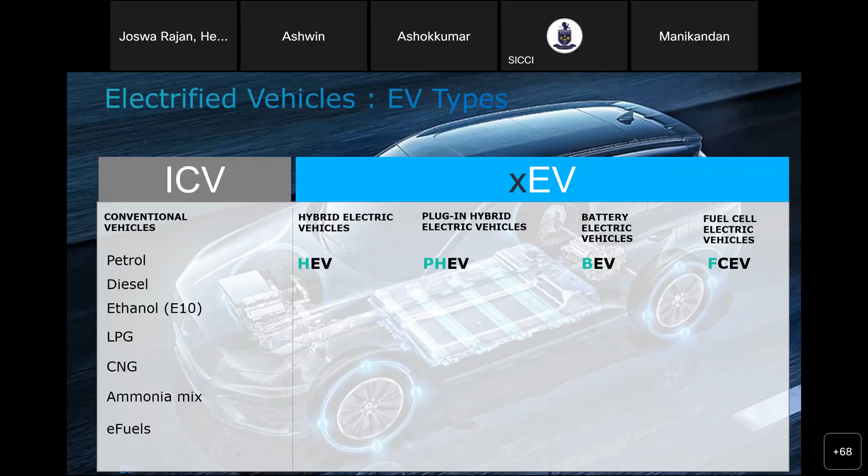When we speak of EV, we want to be clear it's not just battery vehicles. Let's call it XEV, where the X can be replaced with H for hybrid, plug-in hybrid, battery, or even fuel cell, which we call FCEV. Let's leave fuel cell out for now and have a quick basic comparison, since this webinar is intended to give a general introduction and overview of EV and powertrain.

The deep dives will follow. We'll also organize technical discussions and trainings. But for today, from a simple overview, let's look at the conventional vehicle, which is very simple: pretty much we burn things. There's a fuel you inject through an injection system, we burn the fuel which is converted to heat, and heat to mechanical force or energy.

Now if we look at electrification, HEV and PHEV are viewed more as bridging technology, but not ideal. A buyer might think, what if the battery runs down and gets empty like my phone, so I'll go for a hybrid. But actually, from both an economical and ecological point of view, hybrids and plug-in hybrids don't make much sense, though they calm down the anxiety.

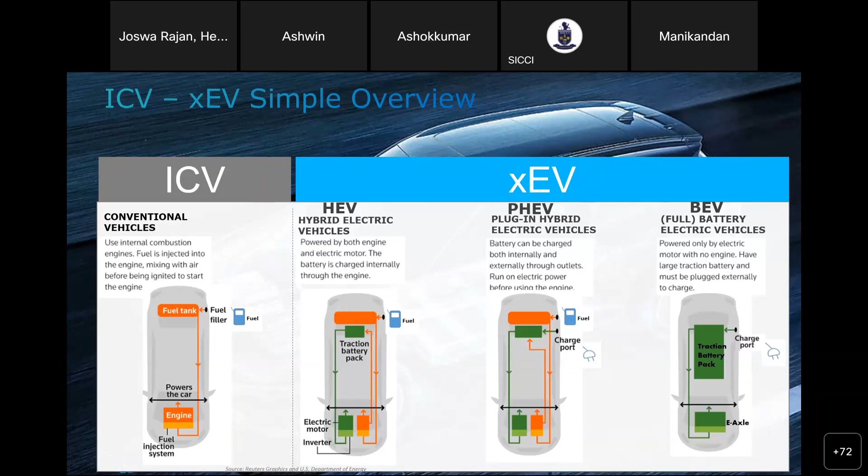The difference between hybrid and plug-in hybrid is simply as you see in the title. In the battery electric vehicle, the actuator is simply the motor. In hybrids, the actuator is primarily the combustion engine. Maybe for 0 to 50 kilometers or city driving you may use the electric motor, or use it only to charge the battery, but how much range is provided by the motor versus the battery in a hybrid vehicle is something to be questioned.

Another way to look at it is the fuels - what's the consumption? For hybrid and plug-in hybrid it's petrol or gasoline, plus fuel and electricity, and for battery electric it's only electricity. So you look at the actuators as well here.

I'm not going to read through all the advantages, but a primary one put forward for a battery electric vehicle is usually the environmental part. To be honest, I don't think it's a complete solution. For an electric vehicle, you have to question where the energy is generated from - the well to wheel, not just the tank to wheel part, not just what's happening at the car. An electric vehicle is a discussion about the entire ecosystem.

If it's not environmental, is it beneficial? Yes, electric cars do provide a much greener option compared to conventional vehicles, especially calculating the entire life cycle of the car. The break even in terms of emissions typically happens around 3 to 5 years, and the same for ownership cost. But I also believe the driving impetus is political - oil independence. There's a political and economic force behind the EV story. Any benefit a battery electric vehicle can provide, I will take it, because that's the times we are in.

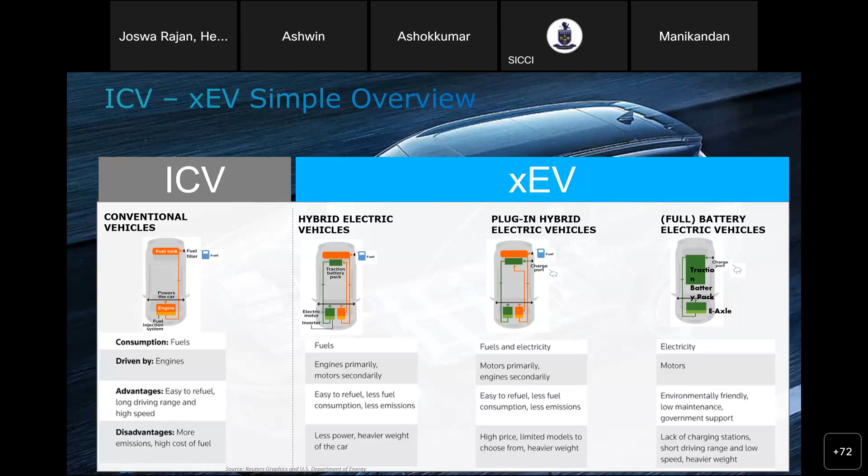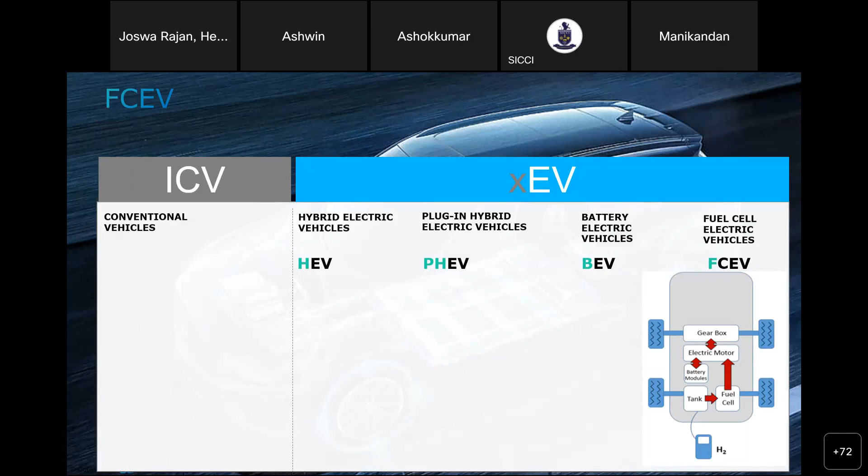Fuel cell, just a very quick view: the fuel is of course hydrogen. Hydrogen is pumped into the tank, and then we have something called a PEM system, or there are different systems, where the fuel cell converts the hydrogen to electricity, and that electricity is used for charging your battery, which in turn drives the motor. That's how the fuel cell works.

Let's look at an overview. If I ask, have you been driving an electric car even with petrol or gasoline? Actually, yes, there's something called the level of hybridization or degree of electrification. You have been driving a car with a battery to drive the 12-volt or 48-volt system. But how much range do you get from that battery? None, right? Yes, we can have engine start-stop, the alternator will work, but that doesn't mean you have a range.

So that part is therefore called micro electrification. Then comes mild, where you have the belt starter alternator. Then comes the hybrids, what we have looked at, and then comes the full BEV. You look at the difference, the range makes a difference, and also the size of the battery and power. Now actually we have vehicles already with 400 to 800 volts.

Porsche Taycan is an example with 800 volts, but most cars you will find as a 400 volt system. What's interesting is right now the technology is going over 1,000 volts. Imagine sitting on a car over 1,000 volts. Then comes the question of safety, design, and appreciation for the engineering. That doesn't mean it's dangerous.

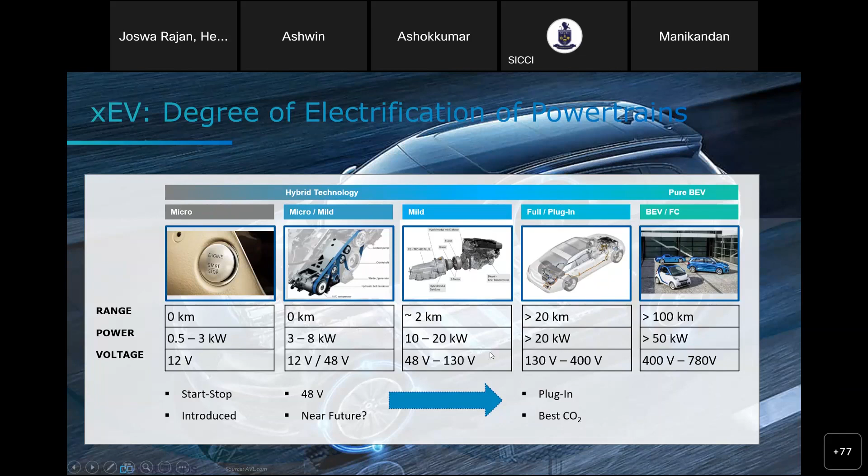Cost - this is another point. I think when we buy cars in India, we ask a few things: what's my resale value, or what's the overall maintenance cost? What you will see here is the overall total maintenance cost for an EV is about 40% less than a conventional car. Why? Very simple, because there are a lot more reduced parts.

There's around 2,000 parts in an engine, but then there's around 200 parts in an electric motor. Also there are parts like air filters, fuel filters - there is none, you don't need it. There is nothing called spark plugs in an EV. So simply you don't need a number of parts.

But what's interesting, which might be intriguing for you, is brakes and suspensions. These are common parts. How come the cost of a brake is less in an electric vehicle compared to a combustion car? Do you brake less? What's the difference? I mean, spark plugs are not there, understood - you don't have to ignite anything. But why are the brakes less?

The brake cost is also less because there's something called regenerative braking, and also because of the way the inverter - let's call it the controller for now - the way the vehicle controller is optimized. Based on this, even the wear and tear on the brakes is less compared to the combustion engine area.

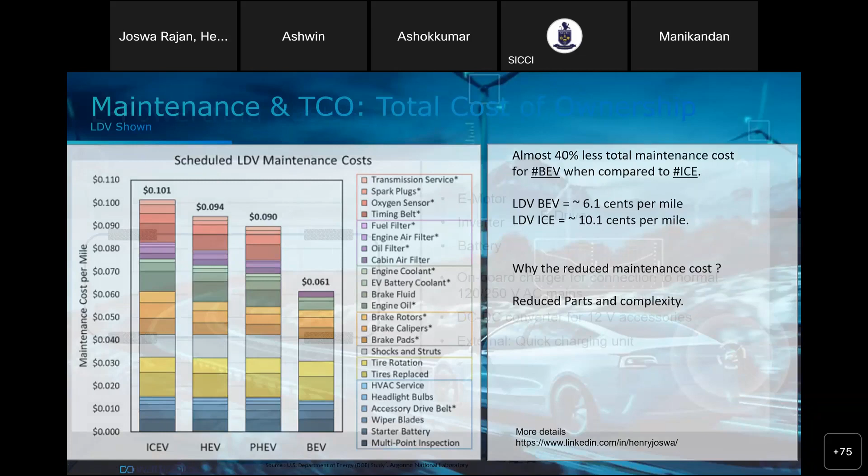Let's take a deep dive into just the battery electric vehicle. Now in this case, what are the main parts of a BEV, an electric vehicle, what we call the battery electric vehicle? Well, the primary parts are e-motor and inverter, together also called e-drive. Then there's your battery, the key area, and then there's an onboard charger and also a DC-DC converter - when I say we have a car working at 400 volts, we also have parts that need to work at 12 volts, like your dashboard, LEDs and chargers.

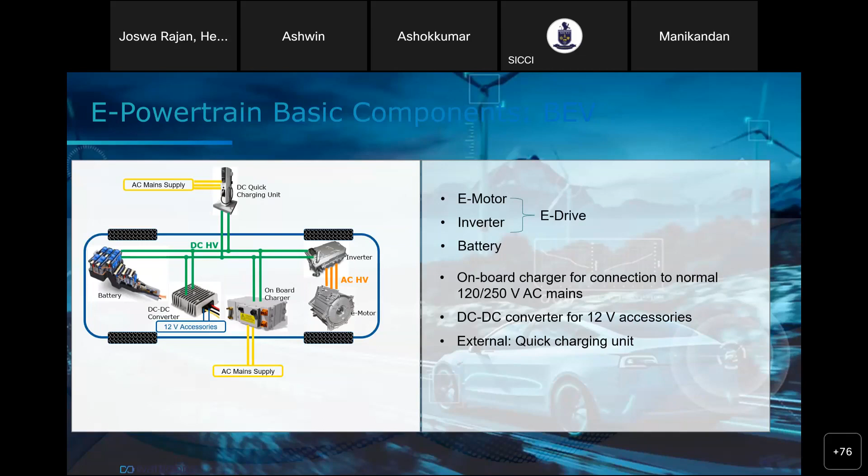So you have to step down - those are DC-DC converters as well. And of course, an external quick charging unit. There's a term we use called powertrain, the core part of the vehicle. In that case it's quite simple - we have only three things: a battery, inverter, and an e-motor. So that's pretty much what we want to do.

Let's take a quick roll. Battery is an energy storage device, and the language that the battery speaks is DC current. The language that a motor speaks is AC current. What does the inverter do? Its primary function is to translate DC to AC and AC to DC backwards. So when we brake, the motor becomes a generator - that's regenerative braking. Or when you coast down a hill, that's charging back the battery. That's the basic function of an inverter.

However, I would say the inverter is the most intelligent part between these three powertrain components. The inverter makes the decisions. People say, yeah, the battery has something called a BMS. BMS is a dumb smart system - most of the decisions and things BMS can monitor, but it cannot control. The inverter is more comparable to a controller.

Battery is the key part - why is it so important? Why does everyone speak about battery in a battery electric vehicle? Well, battery is the most expensive component of a BEV. It makes up around 25% of the car's cost, only the battery. If we look at the powertrain, meaning between the battery, inverter, and e-motor, the battery alone is more than 59%. But have no fear, the price of the battery has been going down.

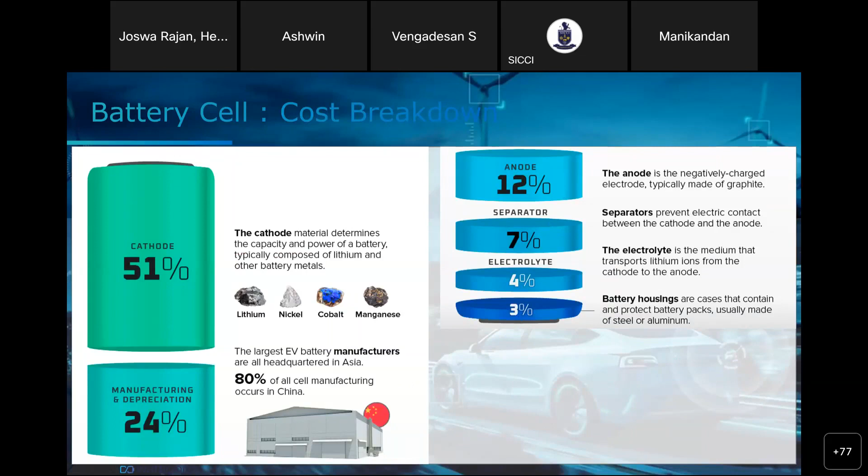Then there's the anode, separator, electrolyte, and the manufacturing process itself. What are these anodes, electrolyte, cathode? Let's get introduced to the battery cell. There are two electrodes, cathode and anode, and then there's a separator which tries to keep those two parts separated. In between, the blue area you see is actually the electrolyte part. And then, of course, there's a battery housing.

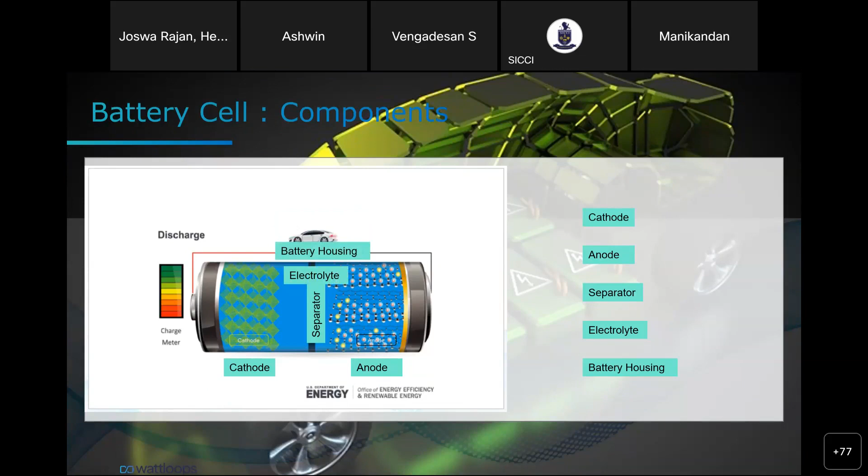How does this work? Inside the battery, what it does is convert a chemical reaction into an electric reaction. How does it work? Very simple. Think of inside the battery there are lithium ions, which are positive, along with electrons. Think of them as a teenage boy and a girl - they always want to be together. However, the separator is like your parent - they say only one of you can go through, you can't be together. However, the electron finds a different way to travel and tries to get to the lithium ion.

The lithium ion, for example, when we discharge, moves from anode to cathode, and when we are charging, it goes from cathode to anode. Whenever the lithium ion wants to move, only the lithium positive ions are allowed to go through the separator, and therefore the electrons must travel outside through the other circuit. And that's how we get electricity.

And inside there's something called intercalation. This is nothing but think of wool clothes, sweaters getting stuck on Velcro or so - that's how it is. So these lithium ions are traveling back and forth, but then they have to get stuck into certain materials - this is the cathode and anode materials, and this is what we call intercalation. They have to stick to it and stay there. And that's how pretty much it works. So when we discharge a battery, the lithium ion moves from anode to cathode, and the corresponding electrons go outside.

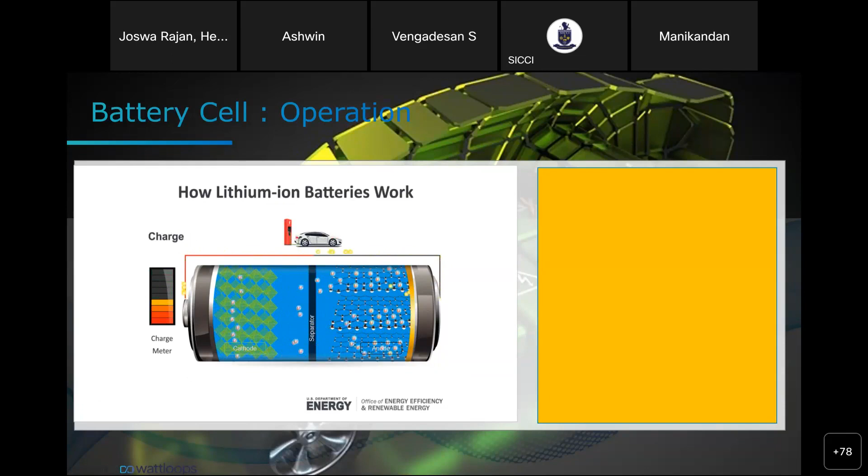And the same way, when we charge, it goes the opposite direction. So in this entire story, there's one thing we do not want: the two electrodes getting in touch with each other at any point in time. This is bad news.

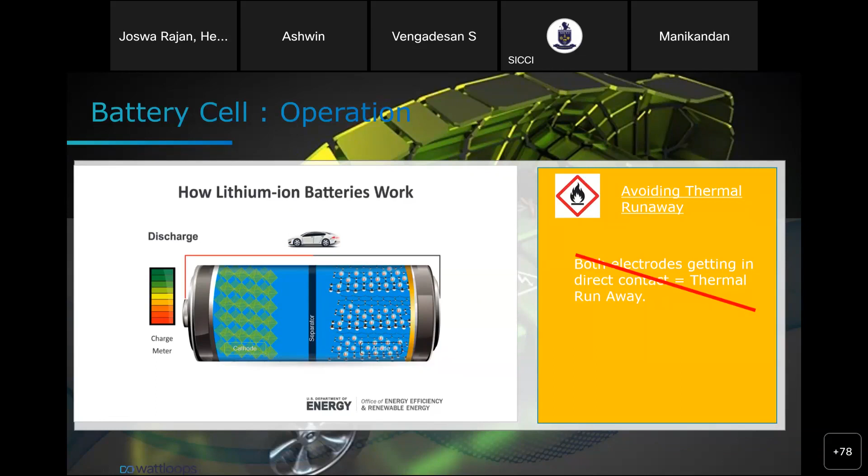This is what causes thermal runaway, or in simple terms, the famous fire. These fires can happen for many different reasons that can cause the separator to break. When you crash, that's a mechanical reason. When something penetrates, like a nail, that's also mechanical. Then there are electrical reasons too, like bad charging habits, overcurrents, or under voltage.

And of course, heating - overheat or underheat. Just like our human body has an optimal temperature, the battery is also happiest functioning at a certain temperature, and coincidentally it's actually room temperature. So any extreme cold or extreme heat is not optimal for the battery. The battery can catch fire from three basic reasons: mechanical abuse, electrical abuse, and thermal abuse. What I mean by abuse is anything beyond normal charging.

All of these, I think, we will see in future webinars, but for now there are three major reasons that can cause thermal runaway. Why do we call it thermal runaway and not a fire? Because it happens quite fast - the thermal runaway happens quite fast.

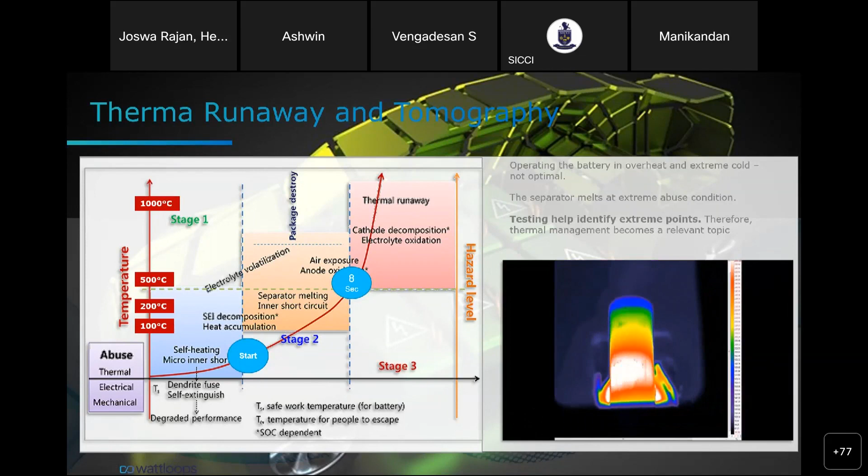So does this mean the battery is bad? No - that's exactly where testing comes in. For any manufacturer, doesn't matter if it's a startup, the key point is that the manufacturer has to test in a proper way. And what does proper mean? There are well-defined testing systems, known testing methodologies, and interestingly, several testing standards and regulations. But does your manufacturer do that? Is there someone to regulate that? Now, the big difference in quality and safety is testing.

As I mentioned, there are different types of testing - we won't jump into this, testing alone could be an entire course, an entire academic course in a university. It's quite a lot. But what's interesting for you to know is there are different categories like functional or performance testing, environmental testing, durability, safety, benchmarking, and then certifications.

These categories can be mechanical-functional, mechanical-thermal, or mechanical-electrical - so these are like a matrix. These tests can be done either in a simulation environment, a test bed, or in the vehicle. The mode controls the optimization of the testing, the cost and optimization - that's what the manufacturer has to think of. But these two, the type and categories, are required; these are the essential amount of testing to be done.

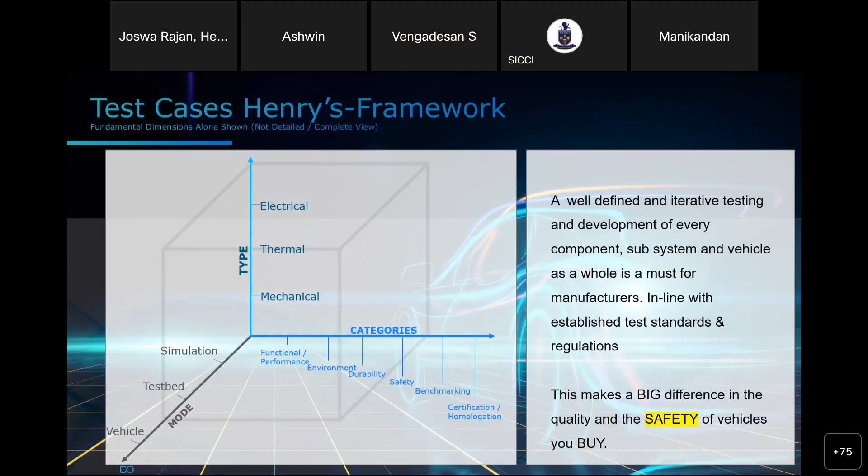So with that, I think it's an apt point to lean into safety and hand over to Vijay, who will be able to talk about safety and regulations.

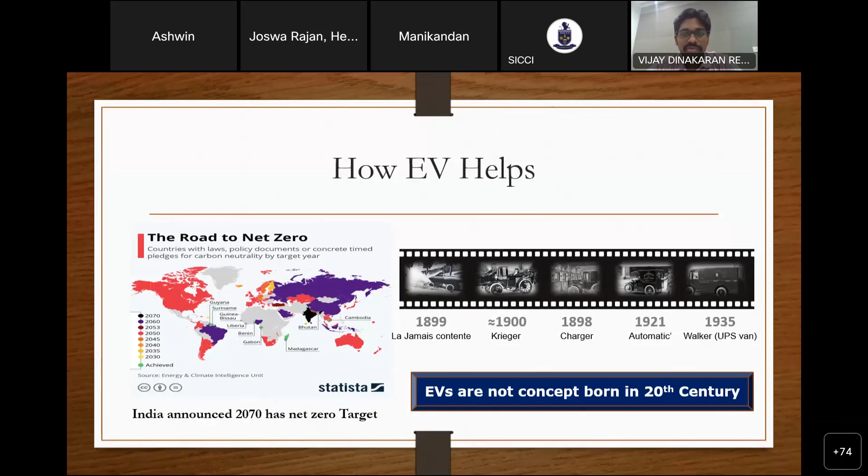Now, when we are adopting a technology, we will quickly check what is their strength, weakness, opportunity, and threats. One very clear strength we can put forth for EVs is it's less polluting. We cannot say any mode of transportation except walking is a clean or eco-friendly technology, but it is less polluting. That's very clear.

We have made a study recently for an entry-level car, maybe I can take an example of an Alto or that level of car. A regular car produces 90 to 105 grams per kilometer of CO2. When it comes to EV, though there is no tailpipe emission in a pure EV vehicle, still, as Henry has pointed out, it's the well-to-wheel aspect, right from the minerals to the tires fitted on EVs on the road. If we take all those factors and make the calculation of CO2 emitted, it still falls at 40 to 50 grams, which is 50% of the ICE.

So that is a clear strength of EVs. There may be speculation that the electricity is coming from coal, so EVs are not clean. But if you check the Central Electricity Authority of India outlook and reports, the quarterly reports for the last 5 years since 2017, you can see a clear trend: we moved from 50 gigawatt of renewables to 175 gigawatt by 2022, and we are targeting 500 gigawatt by 2030. By then our demand will be around 850 gigawatt hour, so 500 gigawatt out of that is roughly more than 60%.

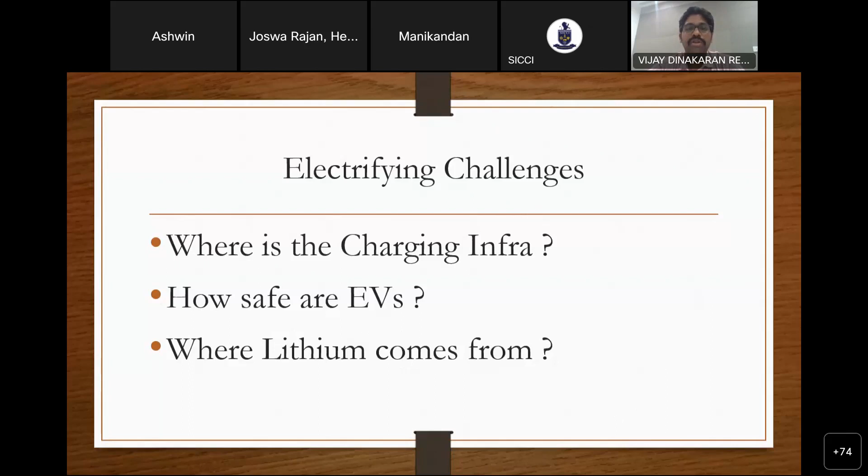We put the batteries on the four-post and do a vibration test. We crash the electric vehicles at 56 kmph against a deformable barrier and check whether the electrolyte leaks, and there should not be any fire or smoke. Then we externally short circuit the terminals and check there should not be fire or smoke.

We also keep it completely on charge, similar to what we do with mobile phones at home - we just put it and forget it. So if we do it to a battery, which may be 2 kilowatt or even 70 kilowatt, what happens? That test is performed as well.

Plus there is a nail penetration test, where you puncture it, because on our roads - not only our roads, any roads in the globe - there might be a chance that something on the road can puncture into the vehicle. So these are the 5 tests done today by the Indian government and test agencies to check whether the batteries are okay.

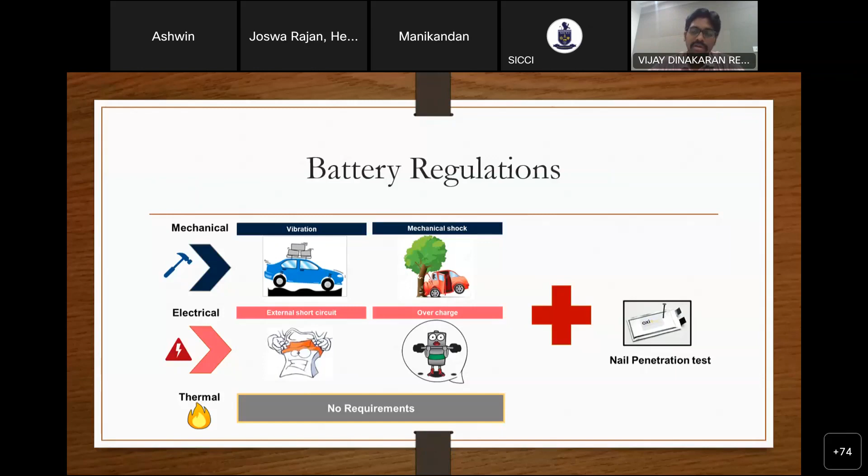Now it looks like everything is covered, but we need to evolve with the market situation. Something has come up called GTR 20, Global Technical Regulations, which has been recognized by around 190 countries in the globe, and India is also party to it. This regulation was published in March 2018, and once published, countries take the requirements and make their own standards.

They need to give a lead time, because the test and validations come at the end, but before that, design and development needs to happen. So it came in 2018 and is being adopted in different countries on different timelines.

Any vehicle sold in a particular country needs to meet this requirement. For example, China is the first country to adopt it, in January 2022. Then we had the US, Korea, and Europe and Japan are going by 2025.

So anyone can guess when India is going for this particular regulation. You can see the global market - these are the 4 big markets where not only by volume but by the amount of regulation they impose for the quality of what's sold.

So any guesses when India might be going for this regulation? You can put it in the chat box - there's absolutely no issue, it's just a random guess, because we always see India going by a certain timeline or something. Any guesses?

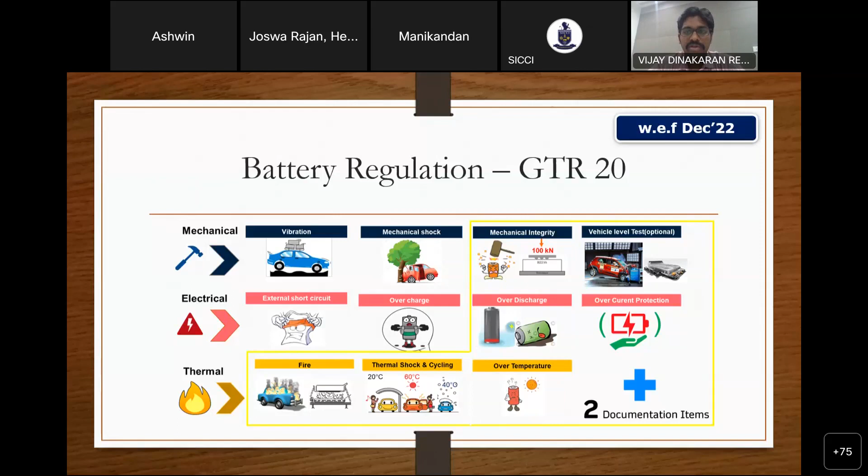Now coming to the incentives - FAME, the Faster Adoption and Manufacturing of Electric Vehicles. When I say electric, it includes hybrids here, like strong hybrid or the plug-in hybrid, as it's called. So it's Faster Adoption and Manufacturing of Electric Vehicles 2.

...a very strong localization criteria. FAME demands almost all EV components to be manufactured and assembled in India, which is very difficult because the volume is very low. So the economies of scale is being impacted. So very limited OEMs today get the FAME incentive.

And there are other criteria - like if it's a car, anything priced above 15 lakhs, you will not get the incentive. That is also one of the criteria because of which many EVs sold in India today don't get the FAME incentive. But on the other front, we have Tata Nexon and Ather Energy and so many vehicles which do get the FAME incentive.

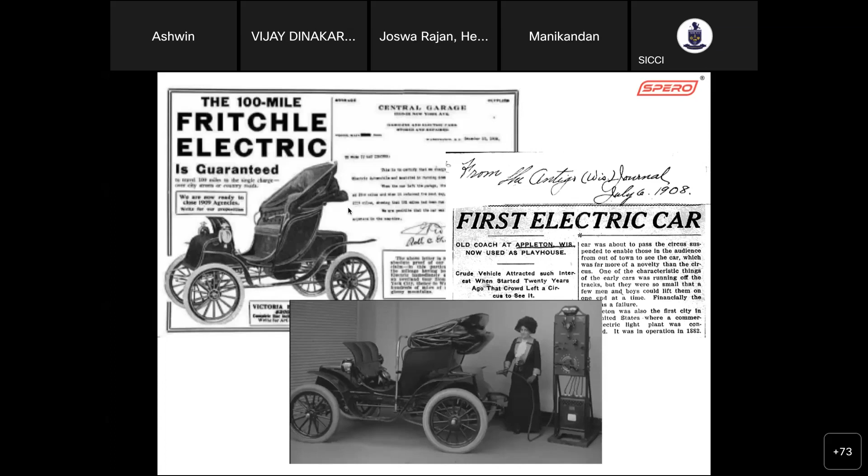...the consumers decided that electric mobility is here for good. But General Motors as a company had different ideas. They decided to withdraw all the vehicles and they were destroyed. Almost all the cars were destroyed, except for a few which are lying in museums.

Now, why this happened is still a mystery. Quite a lot of people have debated over that. Do we still say that electric vehicles in 1996 were too adventurous at that point of time? The mystery still continues. But after Tesla came and said this is how automobiles had to be made, the difference was there.

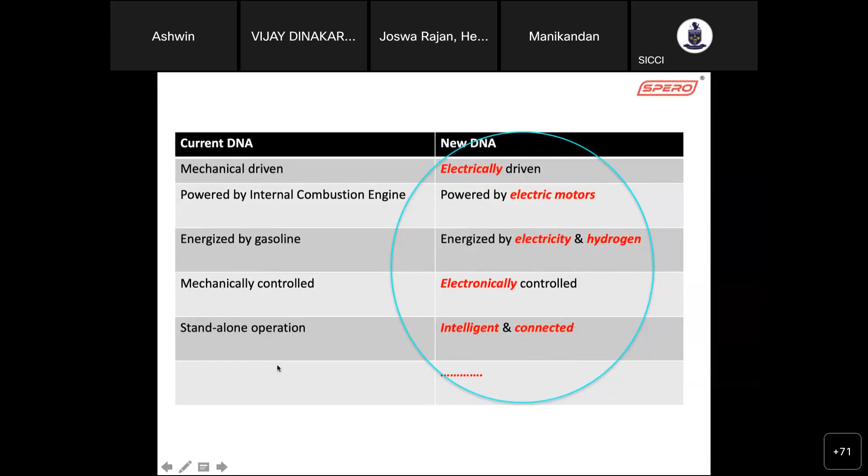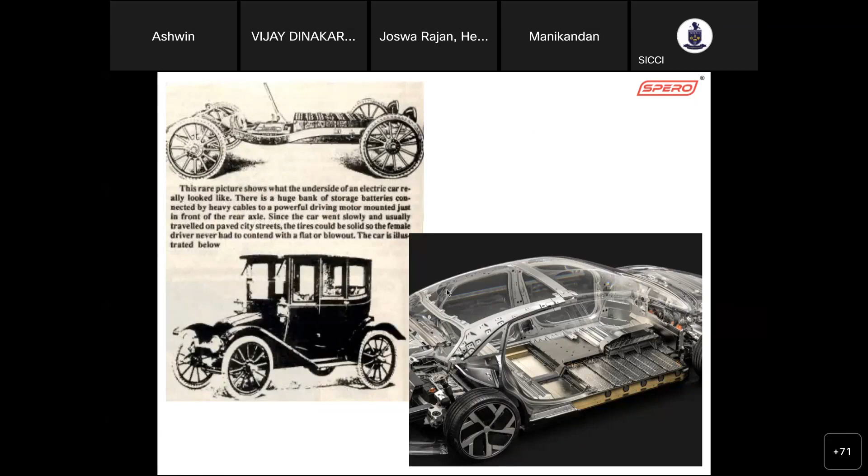Now, if you look at this, you will not see a major difference between what happened in the past, where batteries were stored, and where they're being stored in current generation cars. In 1898, batteries were stacked on the chassis. Today also, Tesla stacks their batteries there. Not much of the DNA has changed there, but what's changed is beyond that: in terms of communication, keeping it well connected, giving different safety parameters—that's all what has changed.

My colleague Vijay was talking about very strong parameters being set for FAME 2 disbursement of subsidies. So when Yo-Yo came in, subsidies were given left, center, and right. Once the subsidies started to get stringent, Yo-Yo sales stopped. That means the sale of Yo-Yos was prompted by the incentives and not by actual acceptance in the market, because the vehicles were failing. The technology was different—they were using different batteries compared to what we're using today.

But let me draw back to what happened with Reva. The consumer mindset in India was actually evolving. We were no longer willing to take the Hindustan Ambassadors and the Premier Padminis. We wanted beyond that.

Now, with that sort of mindset, the Revas could not scale beyond a few being sold in Bangalore, rest of Karnataka, some in Tamil Nadu, maybe a few in Maharashtra. Of course, they did have a reception all the way into the United Kingdom—they sold a few there. But things didn't take off. Maini Motors could not grapple onto the opportunity. They had to give way to Mahindra to see how their technology and know-how could be taken to the next stage.

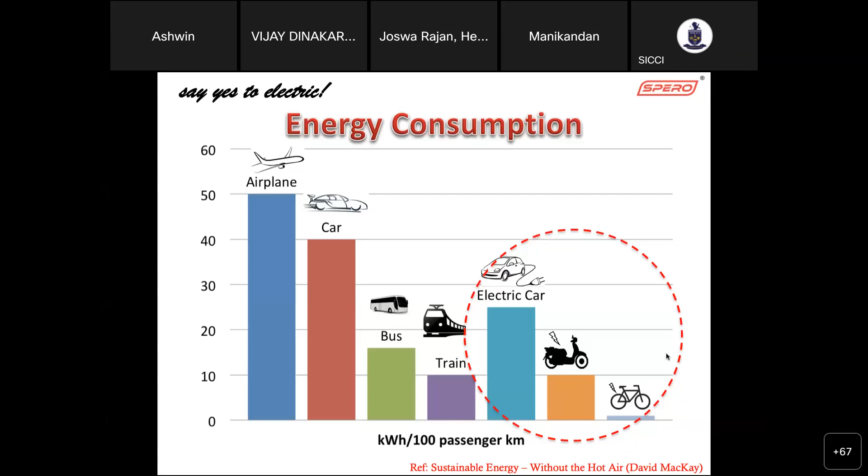We spoke about energy consumption. If you look at an electric car, it's slightly more than a bus, forget the scooter, forget the cycle, just look at the electric car — slightly more than a bus, or probably 40% more, which means we are here. Electric mobility is definitely going to march forward because you save power and are less pollutant. Mind you, this is per person, not the entire bus being calculated.

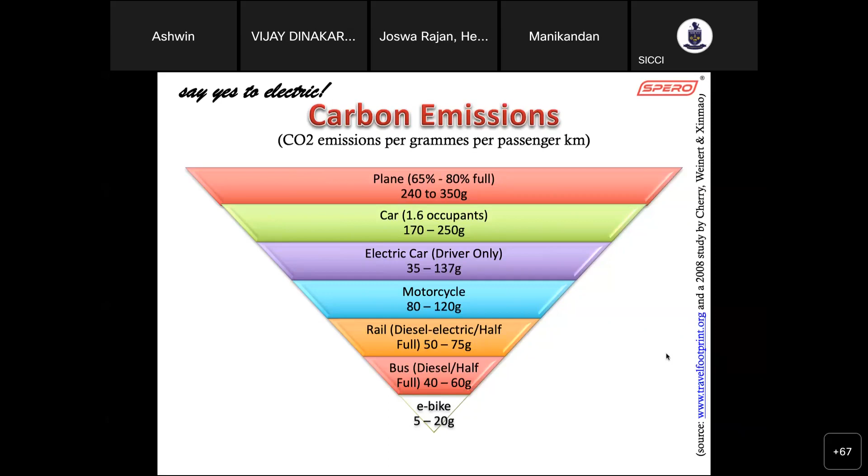Henry mentioned this, but eventually, as Vijay said, 500 gigawatt hour out of 850 gigawatt hour will go to renewables. So definitely we will be there in due course of time. But as we speak today, you can actually control emissions in a power plant — you can't control emissions at the tailpipe of a million cars. That means it's a necessary step forward, and it's a known devil, so we can actually manage it. This is the way things are moving forward.

Corporates are moving, apartment communities are moving, charging stations are being run with renewable power. You'll see a lot of this happening in the future. Almost all smart city projects are taking this up in a very big way. There was a mention about batteries being used as stabilizers for the grids on renewables — it's falling in place. Nissan's got an amazing plan on this.